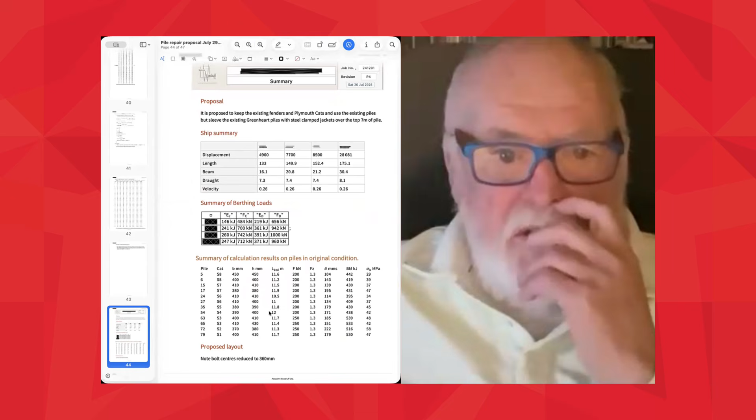What I like about Mathematica is the notebook. It's absolutely ideal. There's a fairly typical set of calculations, and it's nice to be able to use the finite elements in Mathematica, in the calculation, without having to go anywhere else. I actually got Mathematica version 4, around 2000 or 2001, and that was a revelation. The graphics in Mathematica are superb. Although it took me a little while to get into Mathematica at the time, I never looked back really.

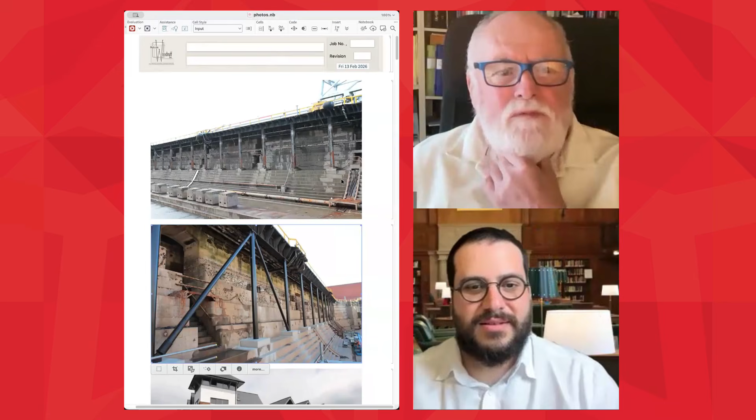Okay, let me share the screen. This is a simple job which I was quite pleased with. It was in a dry dock where the existing Victorian structure's supports to a traveling crane, which you can just see in the corner there, were rusting out. So I designed a replacement using hollow sections to support it, and I was quite pleased with it because it looks better than the original. It took about 15 minutes to actually change each one of these posts.

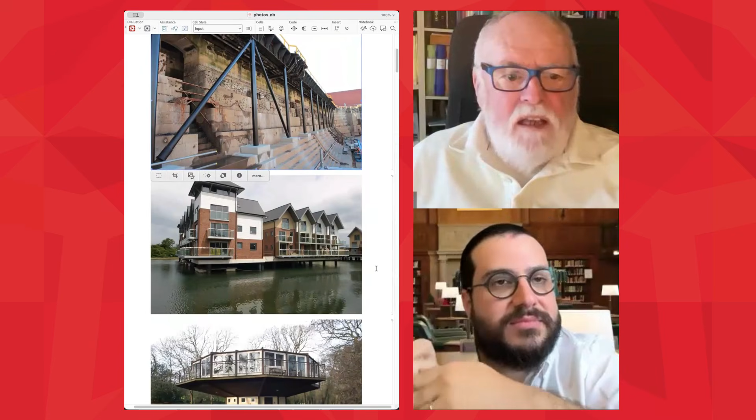This one is on the Isle of Wight. It's a marina, but a new build where they put houses on the marina and then berth their boats next to their houses. So that was quite good, done very much to a strict timetable. That's really nice, I think it was less than a year from conception to completion, which is quite nice.

I've done quite a few houses, so not all the jobs are big like that. That was a Decker house, it's 10-sided, all steel, which was unusual. It's pretty nice. It looks like an upside down house. Yes, I've done a couple of sort of mushroom-shaped ones too, they seem to work well. Oh, mushroom shape, yeah, I can see that.

This one is a house, quite a big house, and the architect very cleverly designed it so there was no column continuous from top to bottom. The post comes down onto the floor, and it was like that all the way around. The only way to design it at the end of the day was as a concrete structure with a brick skin.

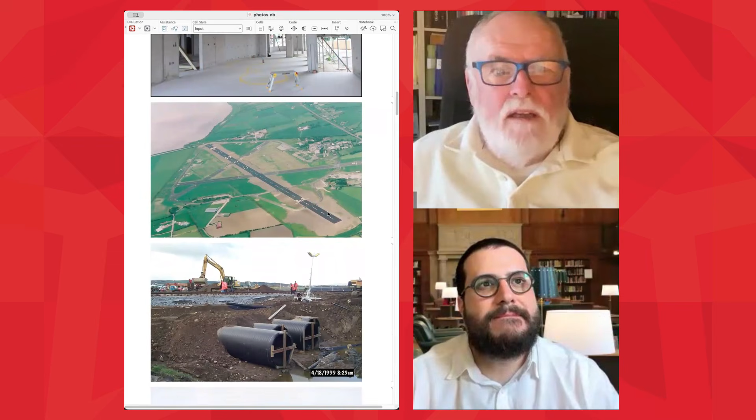This one is an airport I did in Northern Ireland. We did about 3 jobs. We increased the length of the runway at one end, then the other end, and the idea was to take it up over the railway line that runs along there and out into the dock.

But there was a problem with the environmentalists because there were birds nesting, and just before we went out on the lot, we were told we couldn't do it. So the council bought the properties that were under the runway at the other end, and they extended out that way as well.

We also did the taxiway out to a place here where we put an apron up. That job, I think we actually got it at the beginning of November — no, October, got it in the middle of October, I think, and it was complete by May the following year. That's nice, seems like a quick job. It was a quick job, yes. For a civil engineer, I think too quick, really.

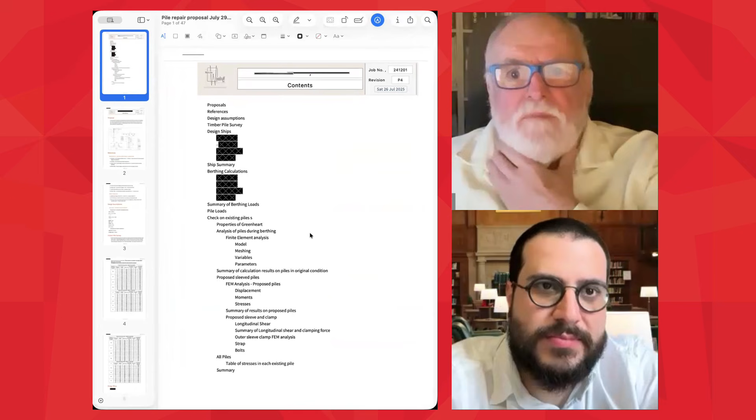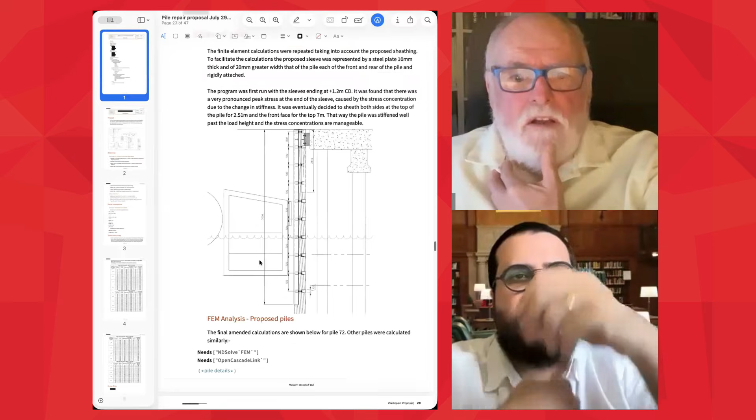This is calculations I submitted for repairing some piles to a jetty. They were written completely in a Wolfram notebook, but then printed out as a PDF. So this is the PDF. It does mean you can use the hyperlinks that you use in the notebook; they can be used in the PDF, which is very useful. So these are the contents.

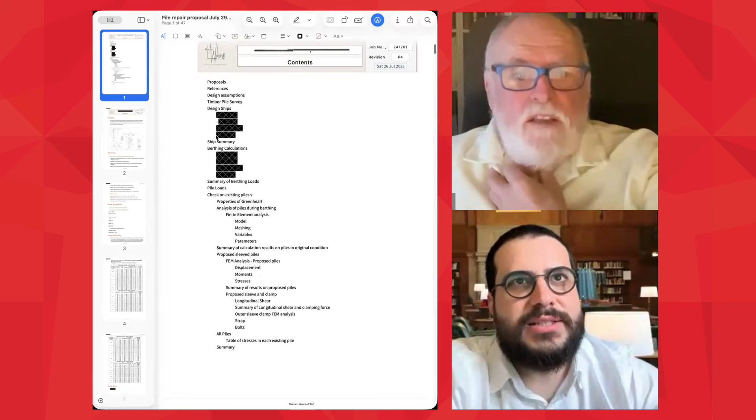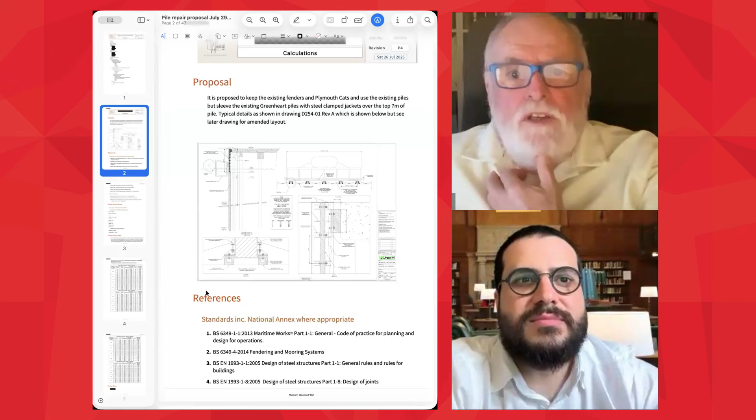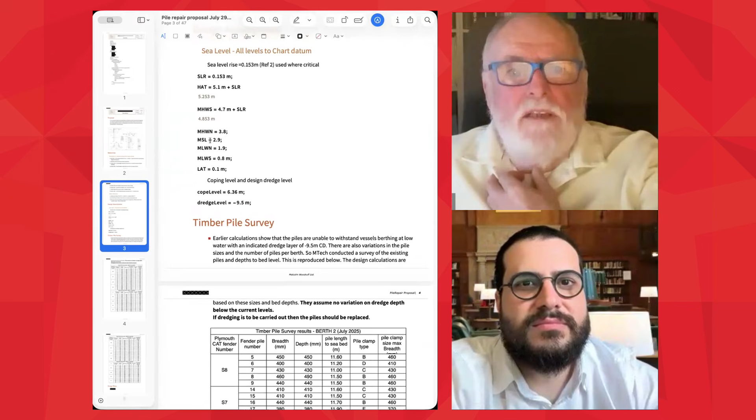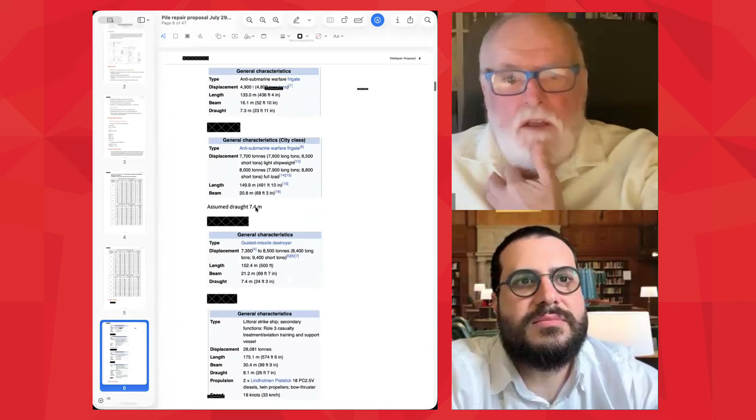Proposal, what we're trying to achieve, drawings that I was working to, references, design assumptions, and here I'm starting to put information in. Tidal levels there, for instance, survey results that I took from a document that was given to me, and design ships that I use. I was able to just drag information in and put it into my calculations. It's a super thing to be able to do.

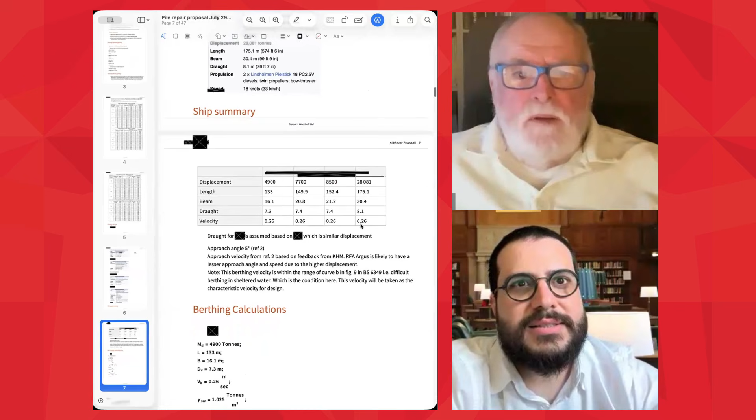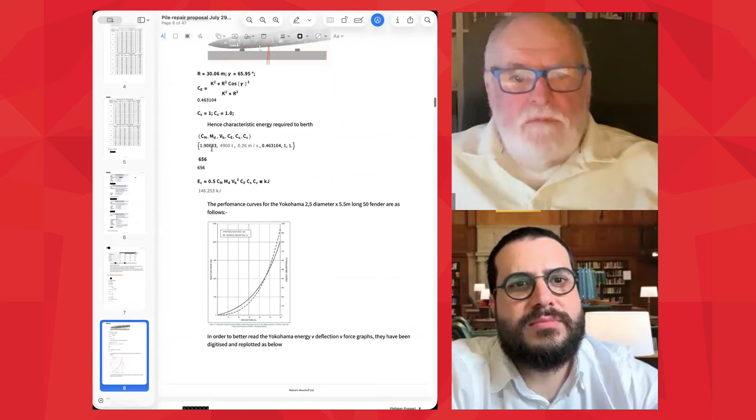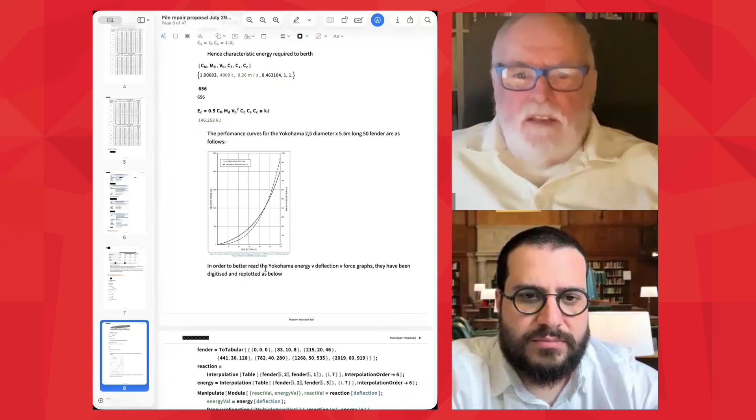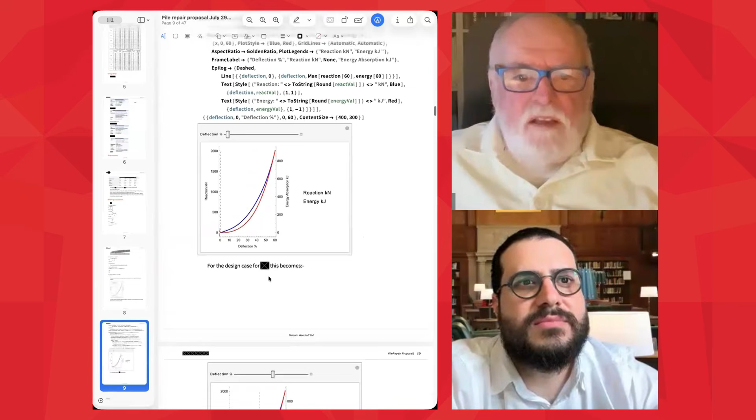Drew a table up, and then worked out the calculations for berthing forces. So a little bit of arithmetic, and then I drew up this Manipulate, which works out the energy absorbed by a fender for the deflection of the fender, and then the force that is transferred through the fender to the structure. Wow, pretty nice. So that's the calcs to get it, and that's an example.

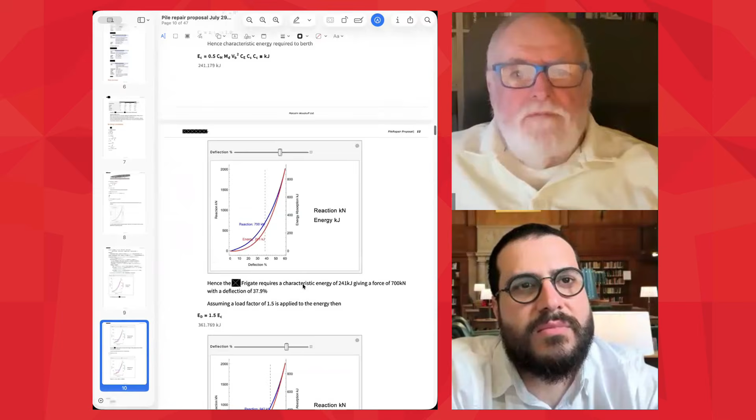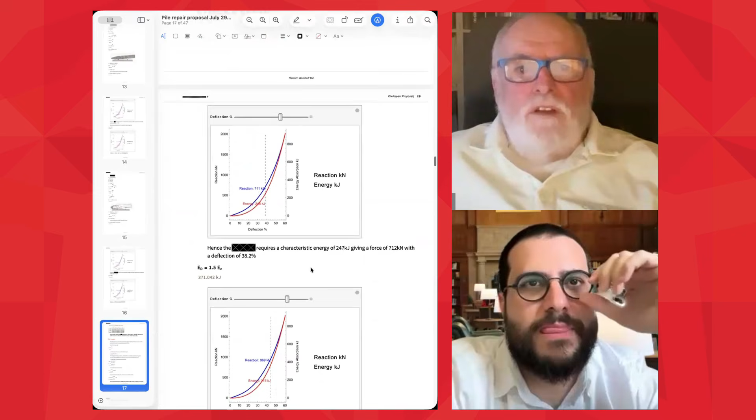By moving the slider for the deflection, where it intercepts the two curves, it gives you the reaction and the energy that was absorbed. So I did that for all the ships. Really nice how you can create a story and at the same time show your calculations, right? Exactly. And if the calculations are too involved, you just close them. They're still there, but you can't see them. They don't interfere with the story, but you can always get them back.

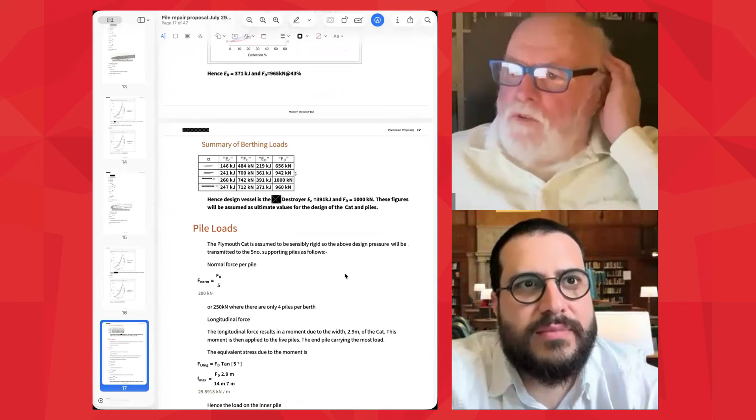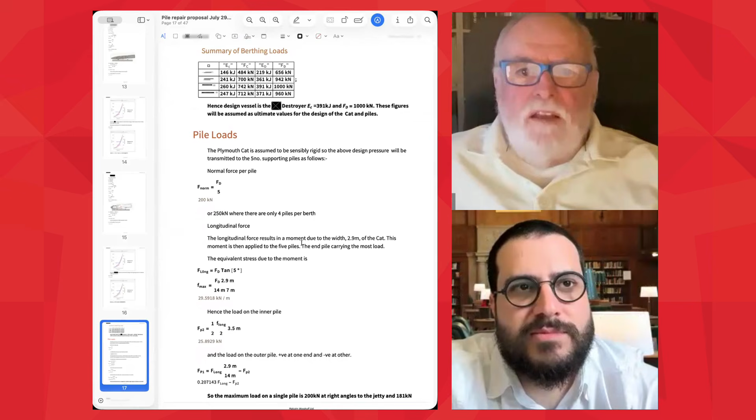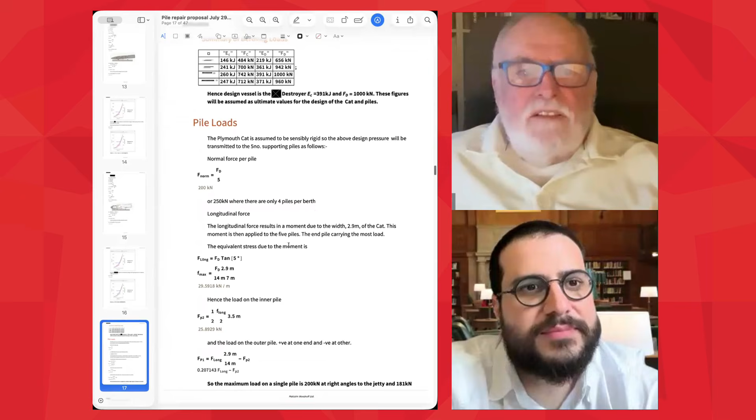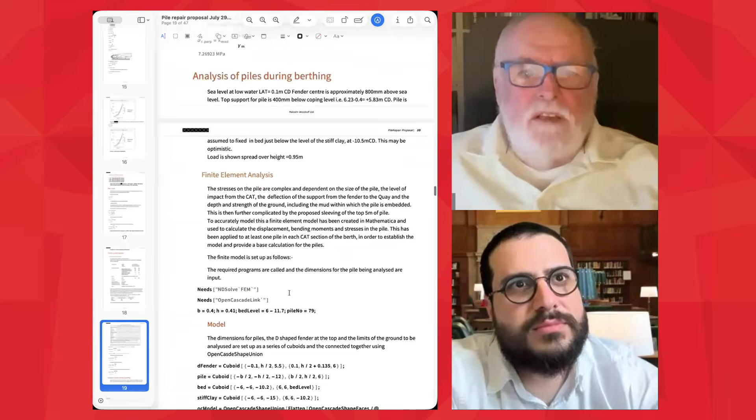That's a very useful thing because just doing some of the graphics, you get a lot of options to show the colours and what have you, which really are not necessary at all. But you can hide all of those. That's good. So working out the loads on the piles, check on the existing, getting information in about stresses allowable on the greenheart piles, then working out the additional forces.

And here I've used finite elements to calculate the forces actually in a pile where it's partly supported at the top. It's just a rubber support onto the jetty, and it's embedded in the ground.

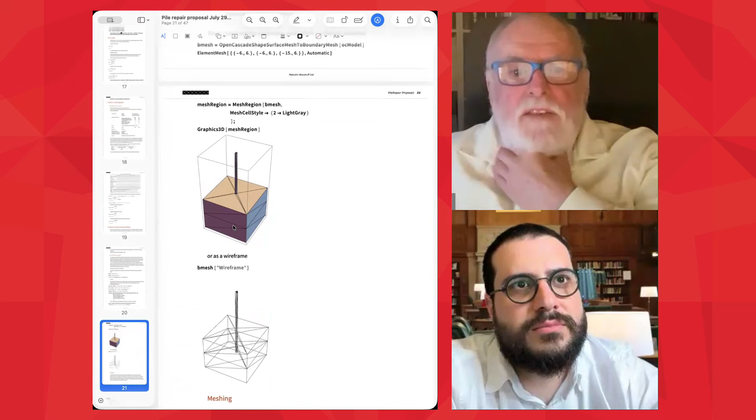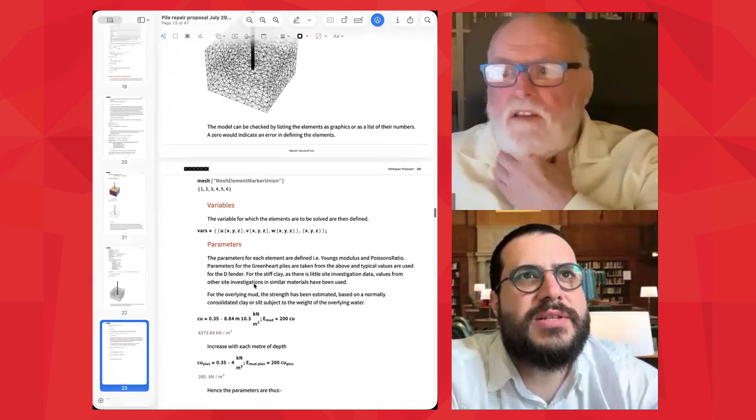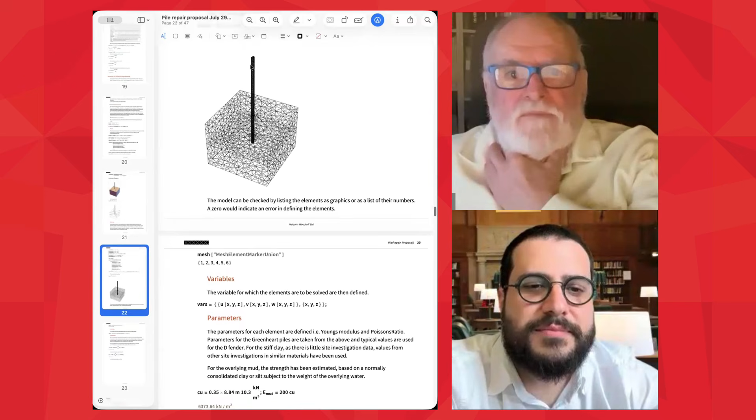So that's all my calculations for the... Wow, this is pretty nice. I mean, this figure on top, it looks like a network, points network to distribute stress. Is that something like this? It is. It's the mesh through which you're actually working out the stresses. You can't see it on the pile because they're so close together, but yeah, on the ground where you can spread it out more.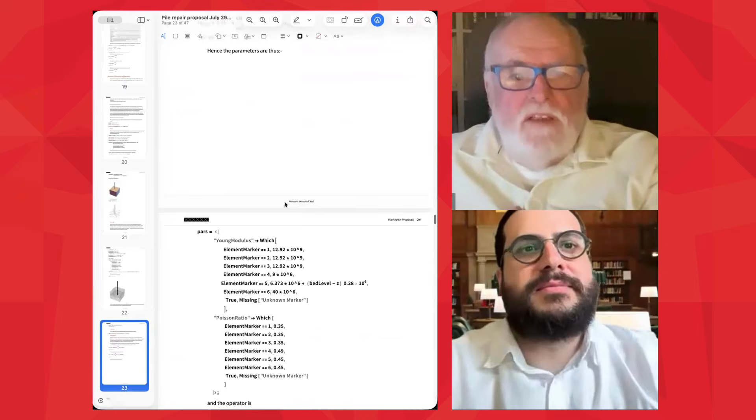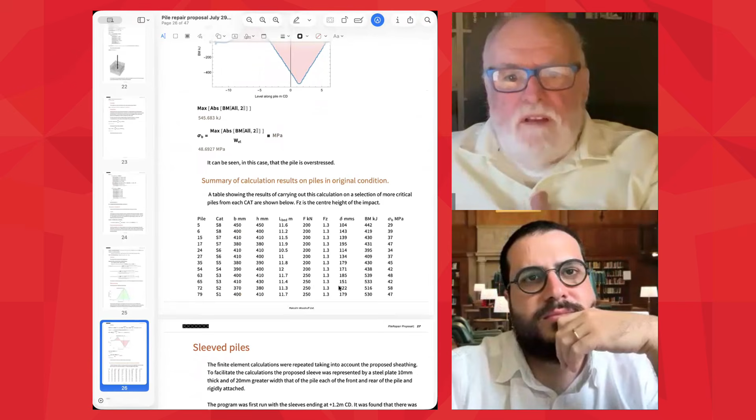That's nice. These are material parameters, boundary conditions. Then you solve it for deflection, and it gives you a nice displacement curve from which you can work out the bending moment. Do that for all of the piles, and then you can produce a table.

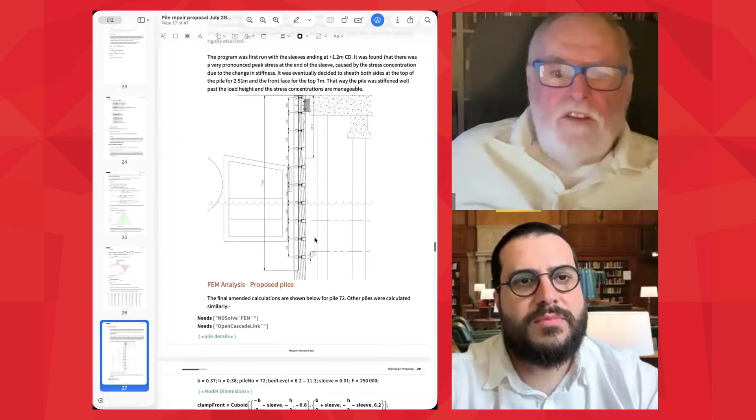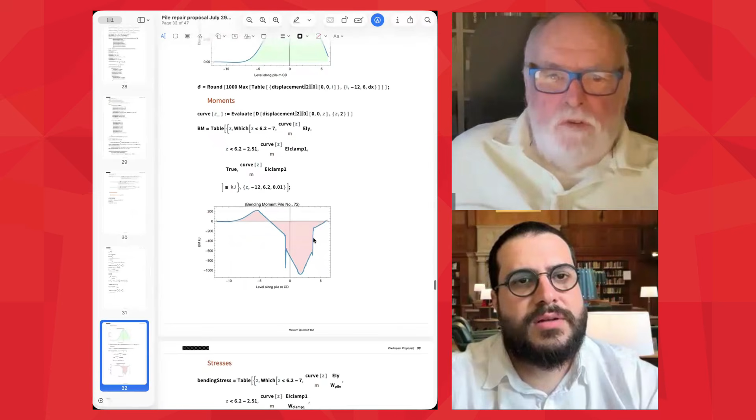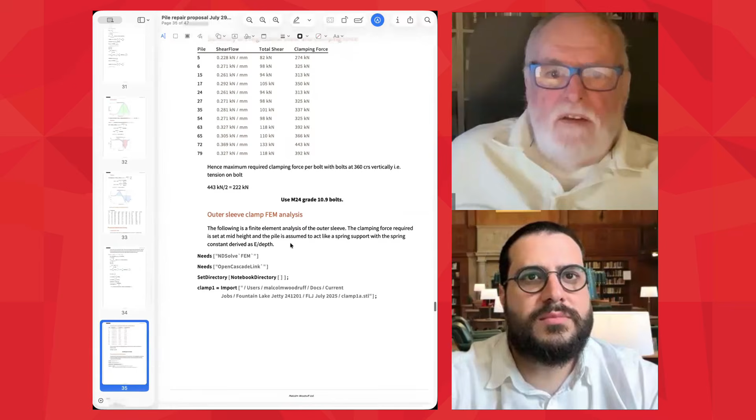Then, because these were splitting because they were old and had been overstressed in the past, we wanted to put sleeves around the ones where it was necessary. So I ran the finite element analysis again with the sleeve, saw the differences that the sleeve made, and then actually calculated the stresses on the clamp.

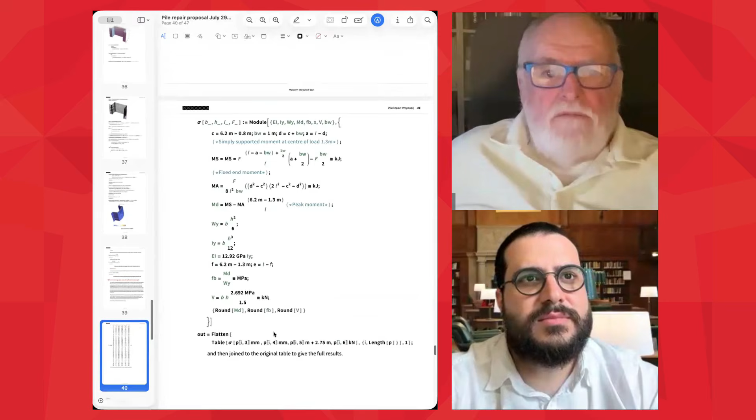Wow, it's really nice. So this is, wow, look at this, the clamp, and that's the deflection on the clamp with the stresses actually painted over it. And then basically summarized it all.

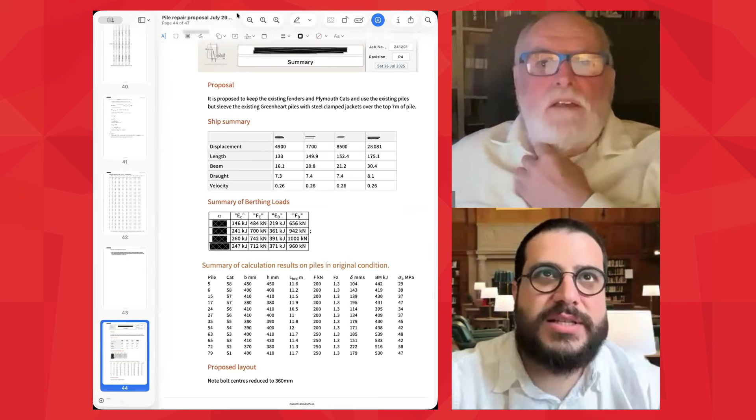It's a fairly typical set of calculations, and it's nice to be able to use the finite elements in Mathematica, in the calculation, without having to go anywhere else. Yes, you don't have to do your calculations and then merge them together into a project. You can write everything at once, so to speak. Yes. And how long did it take you to finish this project, for example? A few days' work at most. Okay.

I did look at the scheme earlier and drew up the whole thing. We were going to replace the fenders and the fender backboards. And then we decided that we would actually repair the piles. So came at it again. A few days. I see.

Yeah. And you told me in our first conversation that you have used Wolfram Mathematica since the very first version, so to speak. Do you remember which one it was? It was version 2. Version 2, I got hold of a copy. I had a good look at it and decided I didn't understand it. But why did you get it in the first place? I needed to be able to do my calculations better than using programmable calculators or computers and basically doing them by hand. By hand? By hand. Yeah, also with a slide rule, so yes.

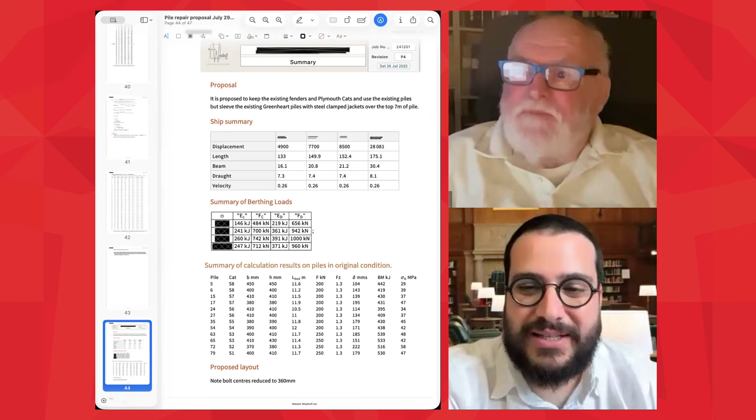And after that many years, I mean, you have been using it for maybe many decades, right? Well, 2.5 decades. Yeah. It's amazing. And you recently published one book, which is really nice. Something that really got my attention was when you show a picture. Maybe I can show it here. I'm not sure if I have it open, but I have. You show a satellite photo of a place near the beach, and then you show the 3D landscape of that photo. I can show you some of those.

Yes. I thought it was amazing because I was so used to just seeing 3D graphs or something like this that I never thought about using that function to visualize an actual place. I've got it here, I think, if you want it. Yes, if you kindly can show it to us, it would be nice.

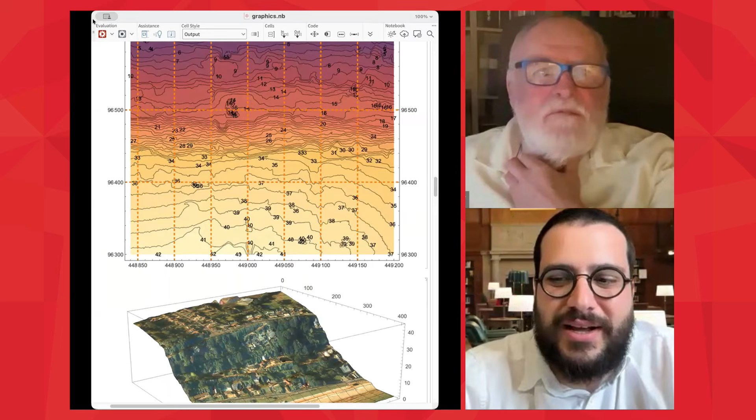There should be a badge for people who are using Wolfram Mathematica since version 2, so people would know. Yeah, exactly that kind of thing. I find it's really amazing.

Yeah, but this one is actually from a LIDAR survey.

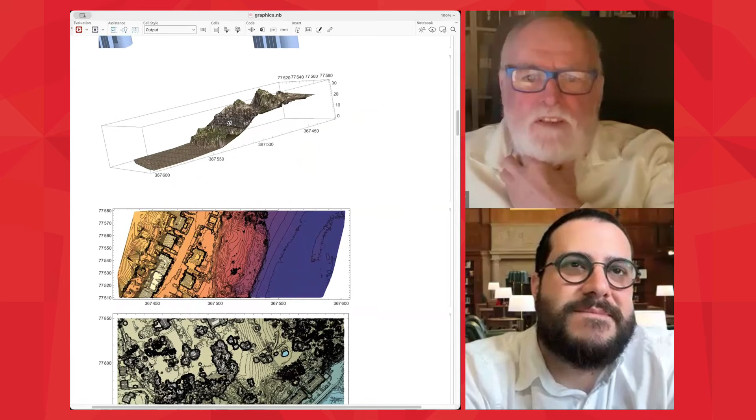A place where they wanted to build, actually on the coastal slope for some reason, and to design some stabilization works. So I got a survey done, and you can imagine there's a huge amount of data in it. Yes. But once you've got it in, you can play with it quite happily. Yeah. This one is a job

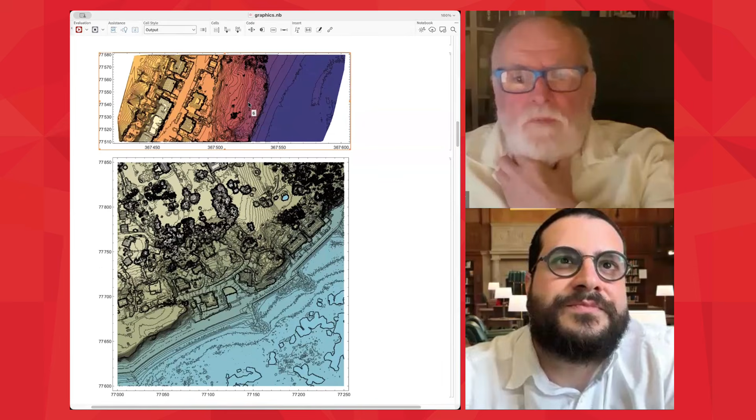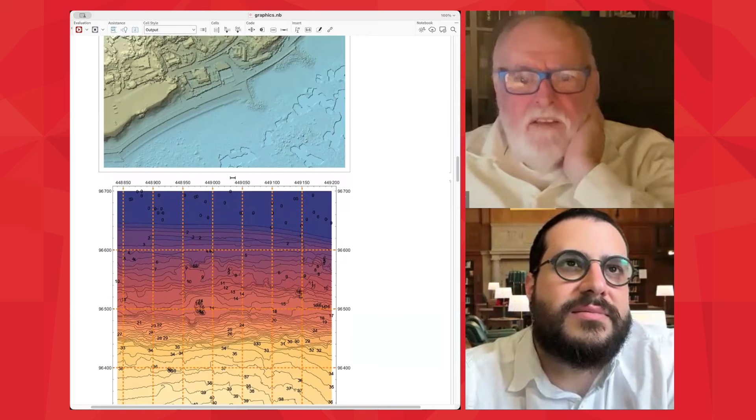where I've taken the LiDAR data in, I draw a contour plan. Same with this one, that's another one. Yeah. But I can output that in 3D. That's a relief plot. The relief plot is very good. I'll show you another one in a minute. That's that area contoured, and then put a photograph over it.

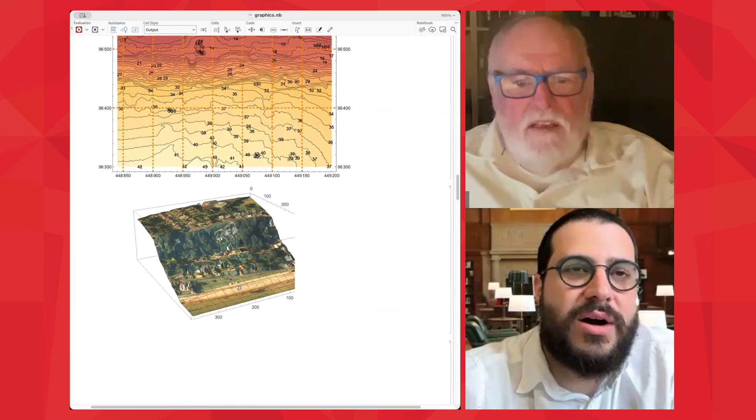I think this is fascinating, like a 3D photograph of the actual height of the terrain. Yes. So it seems like a merge of the actual satellite photograph of that place with the actual points with the different heights for the location exactly combined, right? Yeah, exactly that. And on this one, they're exaggerated a little, but that's through choice. It doesn't have to be.

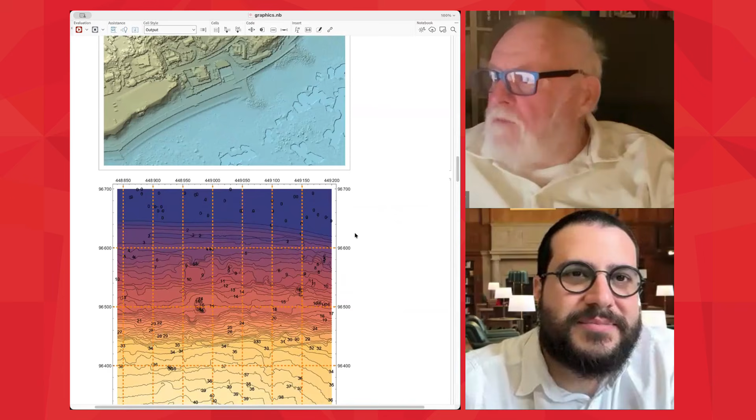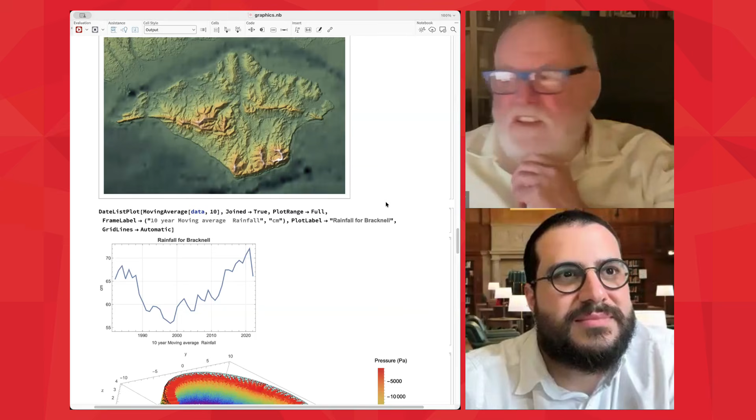I've got another one here, if I can. Oh, that's the relief plot. So, Isle of Wight, just as a matter of interest. Nice. Yeah, there's something about pressure. There's a very colorful pressure diagram below the rainfall. Yeah, that's finite elements.

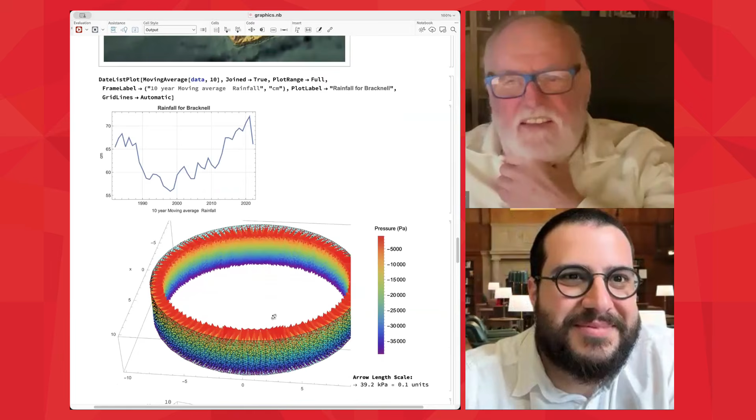Oh, and something that really strikes me is because pressure is negative. Yes, yeah, that's the pressure on a circular tank, which is in my book on finite elements that should be up in the notebook archive any day. It's there. It's ready to be published. It's really nice.

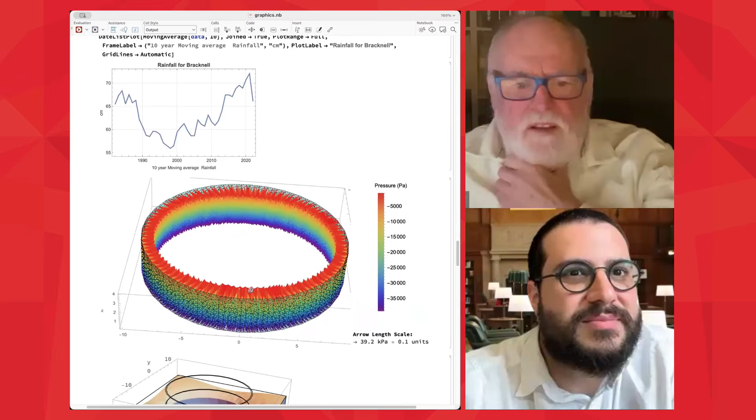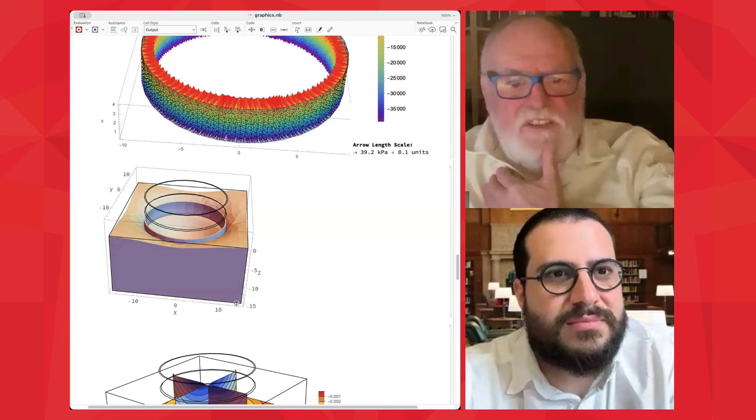Wow, look at this. That's the circular tank, greatly exaggerated, settling into the ground. So that's where it started from, and that's where it ends up. But as I say, exaggerated. You exaggerate these things so that you can actually see what's going on. And then you can do slice plots, contour displacement underneath.

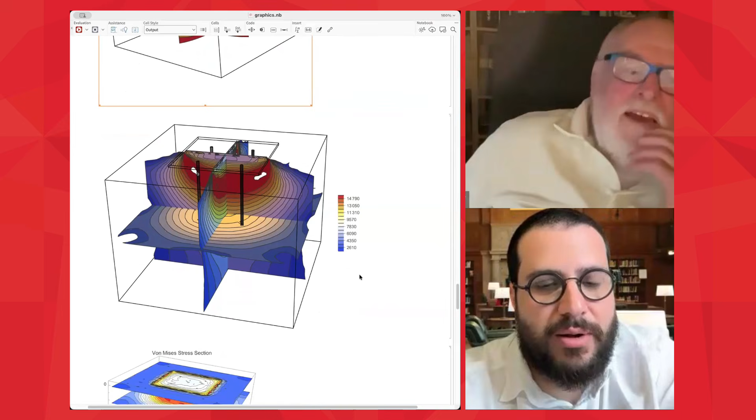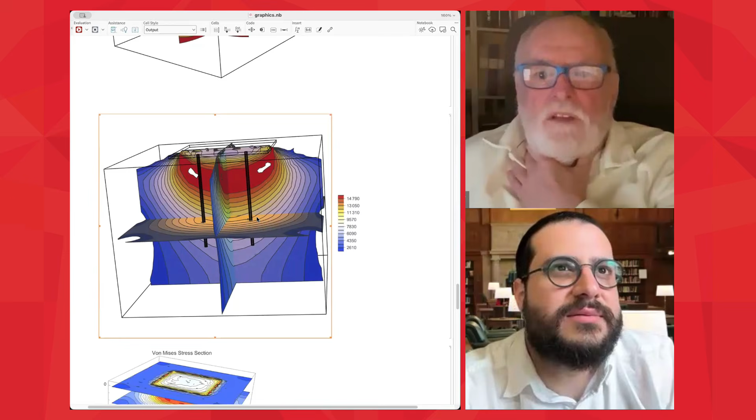But do these kinds of graphs that you're showing to me help you just visualize what's going on in the problem, or do they actually provide information? They provide answers. Yes, they provide answers. Okay. Here, for instance, the contours showing the stresses, and this is a legend showing the stresses for these contours. So you can see it's not a homogeneous stress.

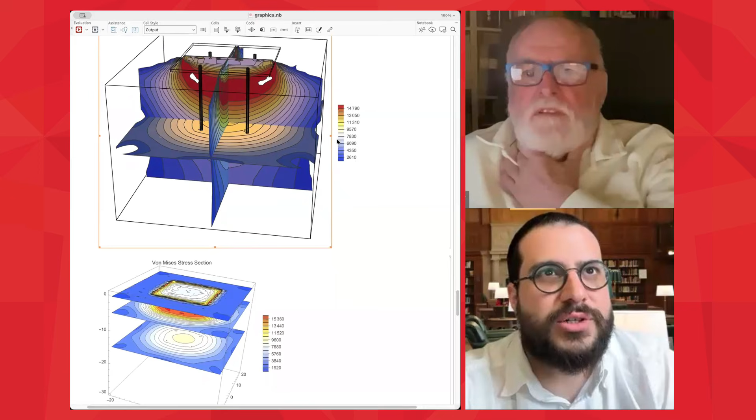There's no homogeneous stress. No. What are those two white areas? Those are the stresses out of the scale that you're plotting. Oh, I see. So I could get those stresses in, but then you'd lose a bit of detail as well. Sure. And that's the same thing in the other direction. And these are all standard Mathematica plots. Very easy to do.

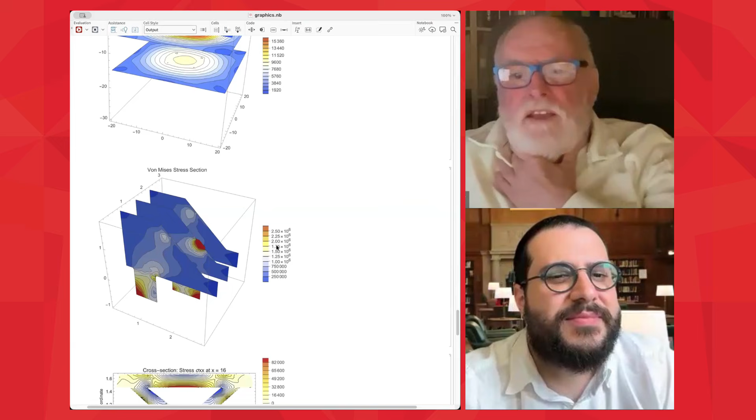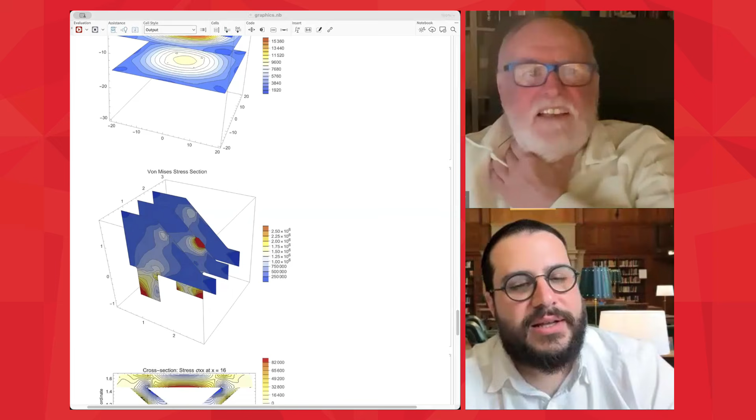Wow, very big stresses, 10 to the power 6. Yes, but they're in Pascal, so that's okay. And is this looking just at a particular component of the stresses? Like I can see in the figure below is sigma xx. Can you see the full stress tensor if you want? Yes. Well, that's the von Mises stresses, which is the combined stresses. Oh, the combined ones. Okay. But if you want to look at the stress in a particular direction, I can do, yes. It's not a problem.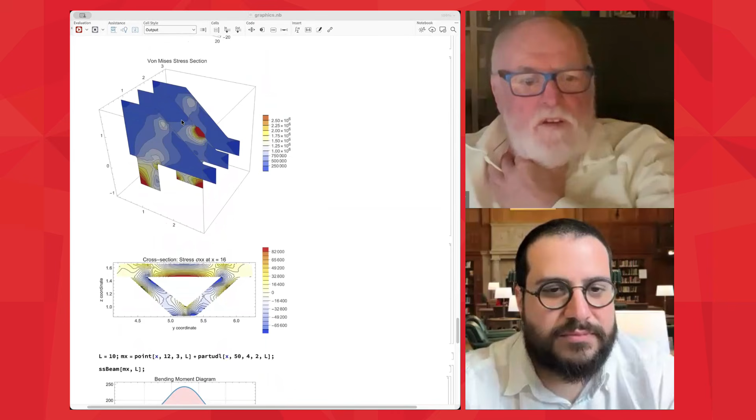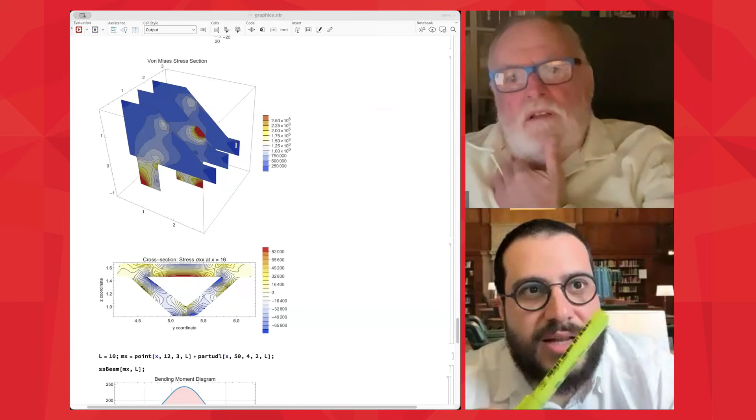But that there is actually the stresses from this anchor block. This is an anchor block that we put in to stabilize some ground with soil nails in, with very high stresses coming in from the soil nails. It's nice that in this cross-section you have both tensile and compressive stress in the same structure, both positive and negative stresses. Yes. It's really interesting.

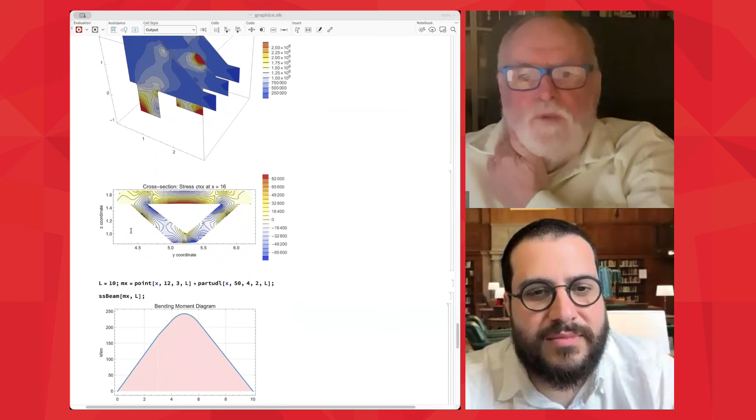This one is just from my book, which is stresses in a V-shaped beam for a footbridge. And that's a Manipulate, so you can actually work your way along the beam. So help me understand how to obtain, for example, this particular plot of the cross-section. What is the process? You have the data of the cross-section. Right, I'll show you that one. What is the process to achieve a figure like this?

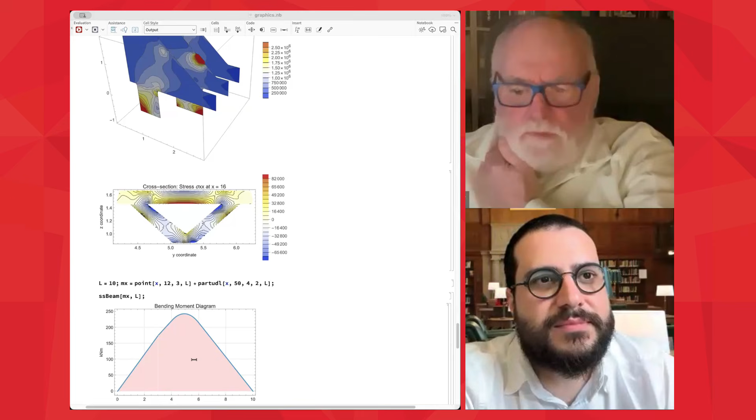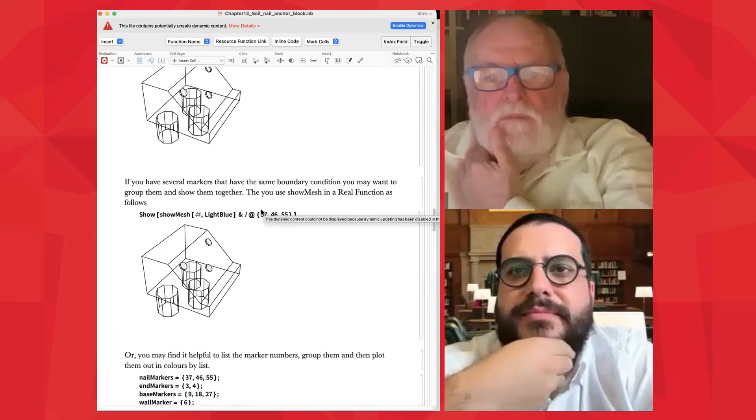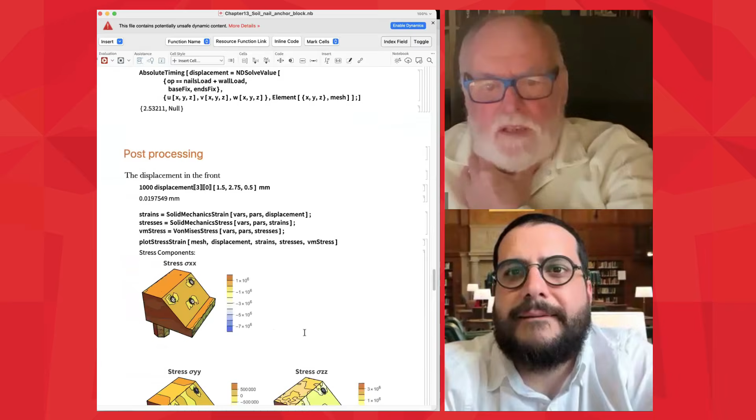Right, I'll show you. I built part of the anchor block in a CAD program, and then meshed it, put in the boundary conditions, markers, and then solved it using the boundary conditions and finite elements to work out the stresses. Then that gives me the stress painted on the face of the model.

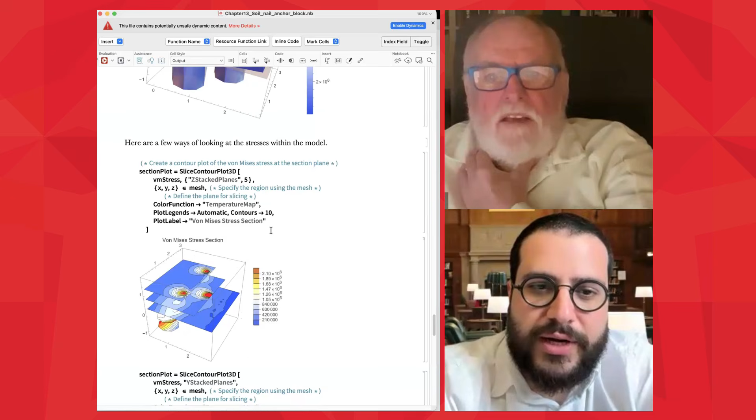That's the whole model with the von Mises stresses painted on and showing the deflection. Again, greatly exaggerated. Okay. Oh, I see. And that is all I need to draw those sections. So you get the forces that are being applied, and then you get the structure you wanted to analyze, and then you use finite elements to generate the stresses. That's right.

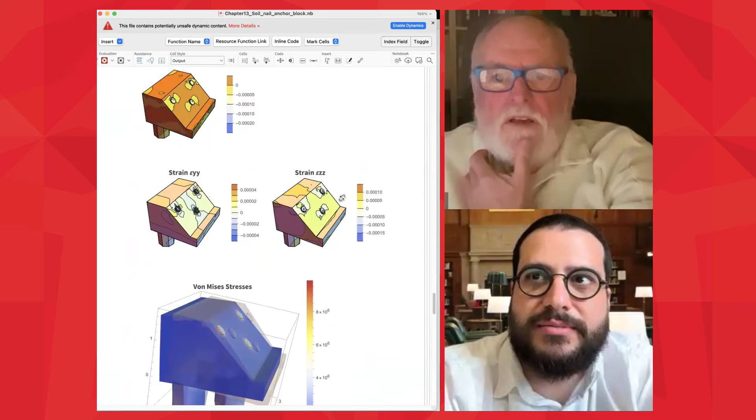Yes. But those forces that you showed in the beginning of this document, which were in the range of kilonewtons, right? Yes. Are those forces standard, or were they chosen for a particular reason? I first started by designing the stabilizing works and finding out what forces I needed to stabilize the ground. Oh, I see. And I did that in a program called FLAC.

The finite elements in Mathematica, they're coming on. They're very good for structures and very good for this sort of thing. But they are not to the standard yet of a program like FLAC or Plaxis that is designed purely for soil mechanics. It's really nice. But there again, last time I upgraded FLAC, it cost me twice what I would pay new for Mathematica. I see.

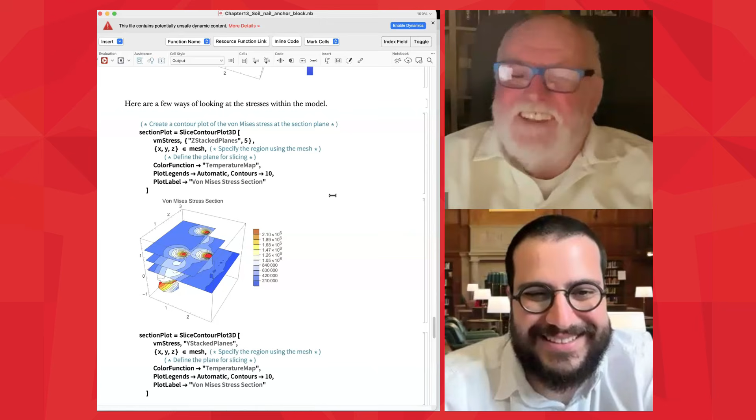So, I have a final question for you regarding the use of Mathematica, actually. Why, in your opinion, should civil and structural engineers today consider learning and using Mathematica? What would you highlight as its main advantages? The ability to gather all the information you require in the notebook, do the calculations, summarize it, and present it. That is, I think, probably the main thing.

But also, it actually enables you to do work that I think you'd find hard to do otherwise without investing in a lot of programs. And then you had the job of presenting what you're doing. I think it's very cost efficient. As I say, to get a solid finite element program, you'll probably pay at least as much as Mathematica on its own, and maybe twice as much, depending what you go for.